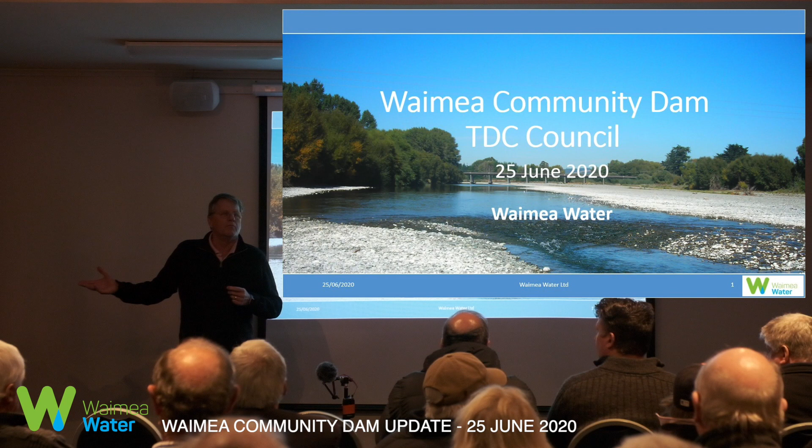Thank you. Thank you. Tēnā koutou katoa. Good evening. Thanks for coming out on a winter's night.

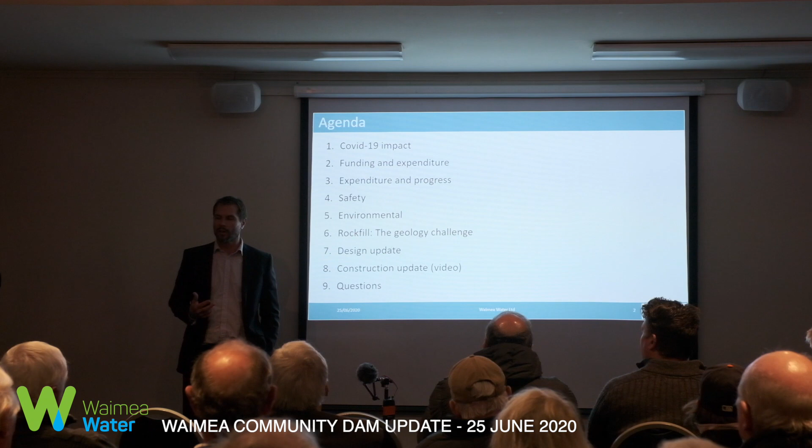I thought tonight what we'll do is just go through a few slides to give you a bit of an update on where we're at, and hopefully answer a lot of the questions you have. Then at the end of tonight we'll come back to questions and address anything we haven't.

So I thought we'd start by describing COVID-19, what that's meant to the project, and then we'll talk about the money and the progress, and where we're at with the budget.

I want to talk about safety and the environmental work we're doing on site, and then I'm going to ask Ian, our design and engineering manager, to talk about the rockfill issue we've had on site, particularly around the geology we've encountered, and provide a design update.

Then between Jim and myself we'll provide you with a bit of an update on construction and show you some pretty cool photos, and then we'll go to questions at the end.

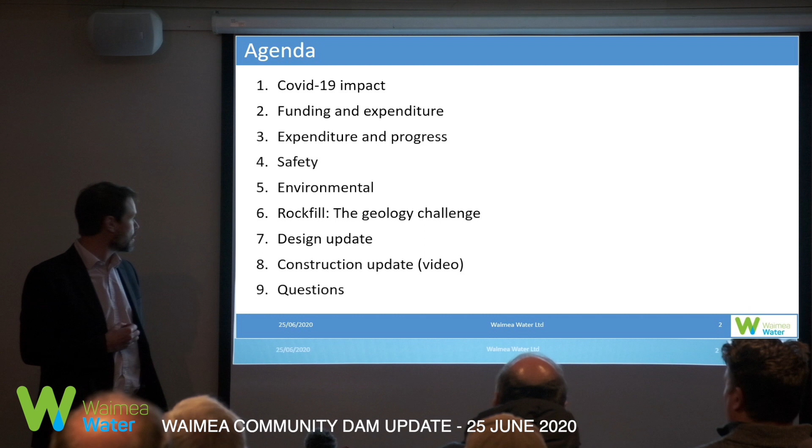So with that, before I start, let me just quickly describe our wider team to you. We have a lot of high-powered people working on this project, a lot of expertise, other than myself.

Clearly we have the Waimea Water Limited team and our board, as you can see in this photo below. We're also supported in our design work by Damwatch Engineering - that's Peter Amos and his team. Peter's here tonight, and their job is to effectively give us a PS1, a producer statement number 1 for any design, and a PS4 for the construction.

The peer reviewer for design is GHD Engineering, which you may have come across. GHD Engineering do the design review, PS2. They're also supporting Jim's team, Fulton Hogan Taylors, with the design of the temporary works. So between Damwatch and GHD, you've got a lot of dam engineering there supporting us.

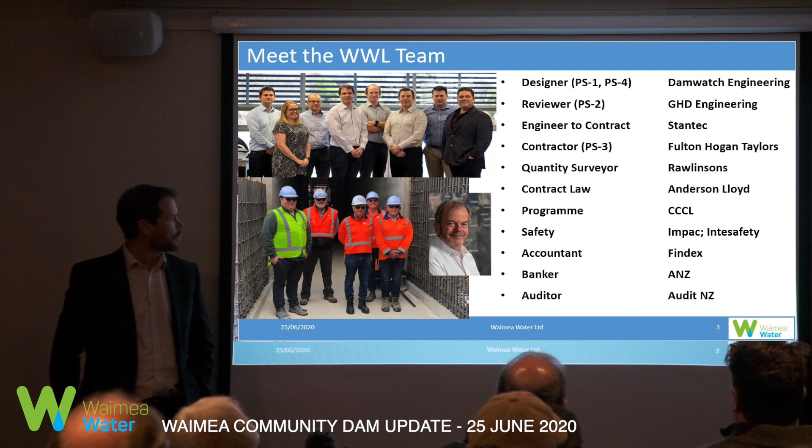Stantec, another engineering company, are engineer to contract and help us with the engineering. Fulton Hogan Taylors, it's Jim and his guys, are building the project. We have Rawlinson's, our QS, and then we have a bunch of support from some professional services in the industry.

The point I'd like to make here is you've got a pretty strong, robust team on all aspects of this project to make sure that we get a really good quality, well built dam.

So let me start with COVID-19. As you all know, we went through level 4 for 5 weeks, and that stopped work, we had to suspend work. We believe that under the MBIE guidelines we could have kept going, but we ended up suspending work for 5 weeks, and then we took a week to remobilise, put in place the additional protocols and facilities, portacoms, to ensure we could work at distance from each other.

And then there was a pretty slow start-up as we got into the new working regime. So we pretty much lost 2 months and counting. The 'and counting' part is we are seeing constraints and disruptions to the international supply chain. COVID-19 seems to be affecting countries around the world in different ways at the moment, and getting spares, machinery and parts out from around the world is proving a challenge.

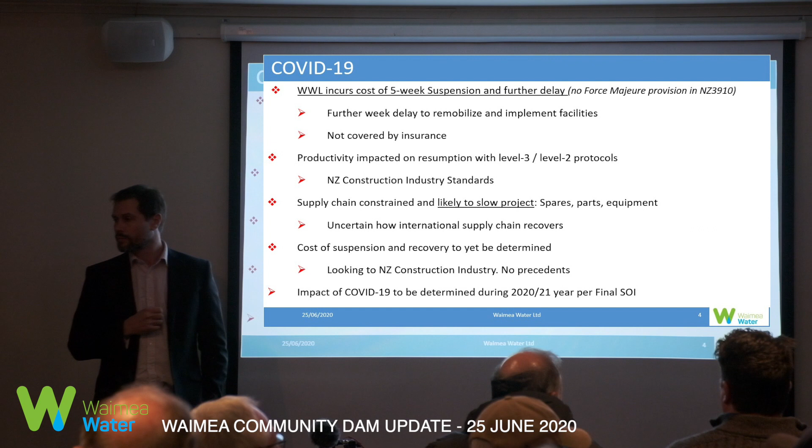Look, with respect to cost, since we last had an opportunity to meet, you would have seen the announcement that the costs have increased by $25 million, really associated with the performance of the rock in the rockfill, and we'll come back to that.

So the cost is really around the geology that we're encountering, and so that $25 million effectively comes as an additional TDC equity here.

That's this bar here. So you can see our source of financing is really from the Waimea equity and the Waimea loan, the irrigator loans, then the TDC equity, and then TDC equity courtesy of some grants, obviously from the Ministry for Environment, Nelson City Council. So there's a bunch of, I think it's $12 million of grants that they get, which converts into equity, and then the additional equity is $25 million.

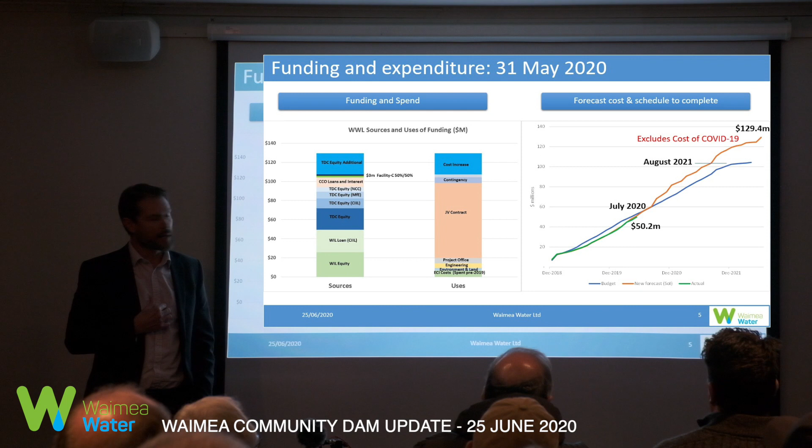So that really supports the cost increase in the project. With respect to spend on the right-hand side there, you can see we're a bit behind the forecast because we're late. We've spent $50 million to date. We'll probably go past our forecast spend in July this year. We'll go past our original budget at 104.4 in about August 21, and then we see ourselves coming out at 129.4. So we've held that number since the start of the year.

You may have seen this in our mid-year report or SOI, statement of intent. This provides just a cost overview. So right now, as I said before, we're looking at $129.4 million as where we see costs, and that's based on what we know now. There may be some wins in front of us, there may be some more costs. We've looked at all the risks we can see in front of us and put some evaluation around it. There's a fair chunk of risk money in there, but it's just based on what we can evaluate now. And you can see that a good chunk of that 16.6 is really around the geology we're encountering.

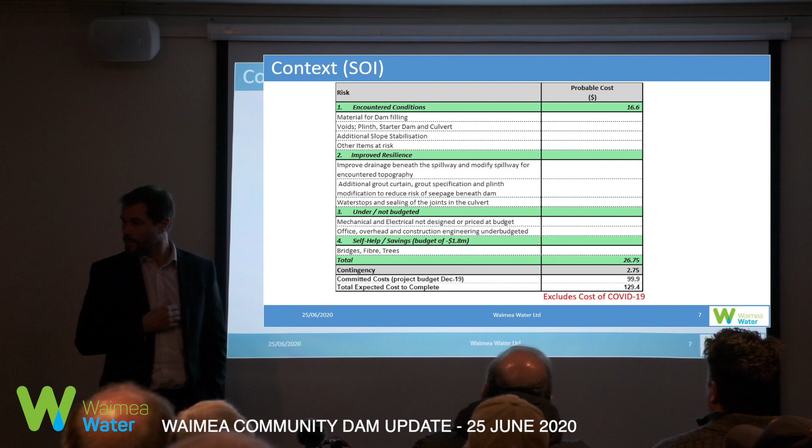With respect to the program, COVID-19 was really brutal to us. We're six months behind, which is about a season, is where we see ourselves. So we've lost that 21-22 season. We're currently working, as I said before, Jim's working pretty hard to find ways to recover part of that program.

One of our key constraints before COVID-19 was resources. You just couldn't get people. Everyone's busy, unemployment was at a record low. We couldn't get skilled resources, tradespeople. Everyone's busy building houses.

Post COVID-19, there may be an opportunity to employ some more tradespeople. So we're talking to the construction companies, and if they have people available, there could be a win-win opportunity here, where we could help support the local economy and people working while actually helping recover part of the program. And that's something that Jim and his guys are currently pursuing.

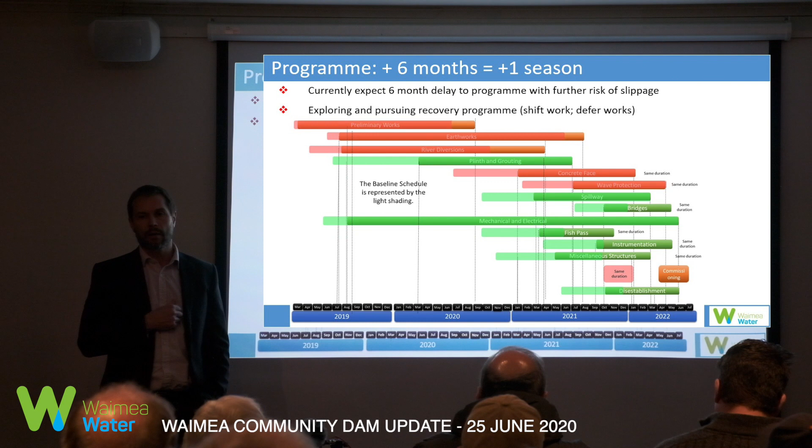So with respect to performance on site and the project, I think one of the real highlights to me right now, and this is worth congratulating Jim and his guys on, is that we've just gone past 500 days and there has not been an injury on site. That is an outstanding performance. I've never seen performance quite like that before. The mentality of the guys on site about safety is just top shelf.

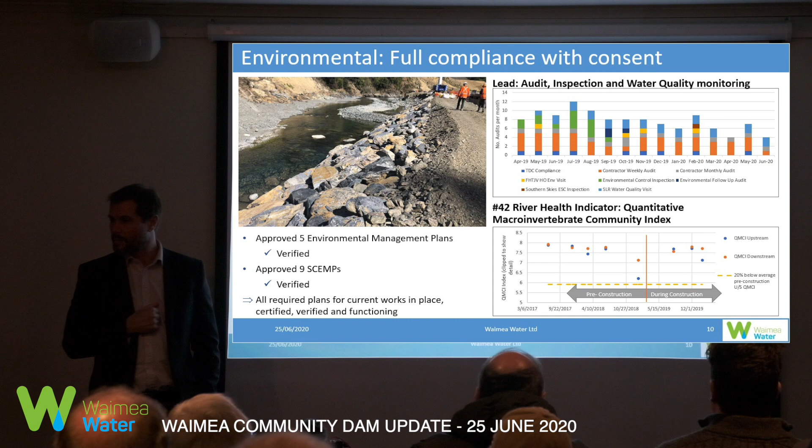So the message I'll leave you with is, we're in full compliance with the resource consent, and we're doing a lot of verification to make sure we do what we say we're going to do.

Right, so I thought we'd turn now to an engineering perspective and talk about the rock. I'll get Ian to talk about this. Since we last met, we've had some issues with the rock, and this has led to part of the cost increase. So it's probably worth taking a little bit of time to describe what the issue is and the problem is, and I'll get Ian and Peter to explain it to you, and then what we're doing about it. So, Ian.

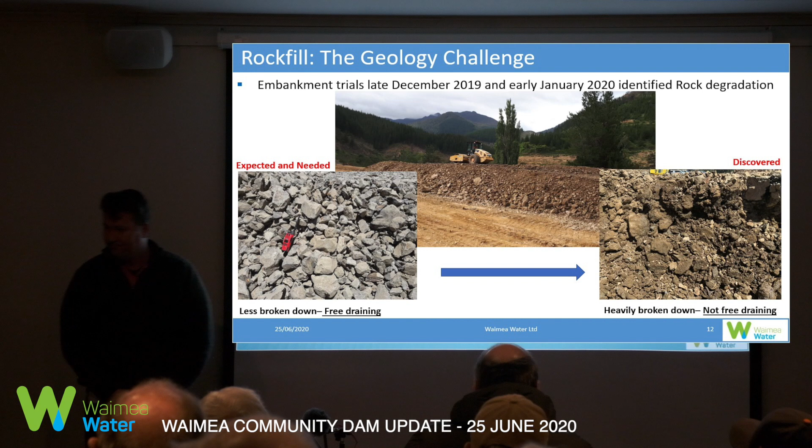From the series of trials and further drilling investigations we've done on site, we've come to discover there's actually a lot more argillite, siltstone and mudstone than expected. We had expected about a 50-50 mix of argillite and greywacke, siltstones and sandstones. But once we've opened up the ground, we've found that to be closer to 70% argillite and 30% greywacke.

You can see in the photo on your left, the argillite's got these inherent foliations, incipient foliations the geologists call them, which is a function of how the rock's formed. It's a sedimentary rock, formed in layers. But unfortunately this argillite hasn't undergone enough metamorphism, it hasn't been squeezed or heated enough to remove those.

And the issue we found is, once that's excavated, screened, dumped into a stockpile, picked up again, hauled out to the site and compacted, it's breaking down quite significantly, like we saw on that first slide. Next slide please, Andy.

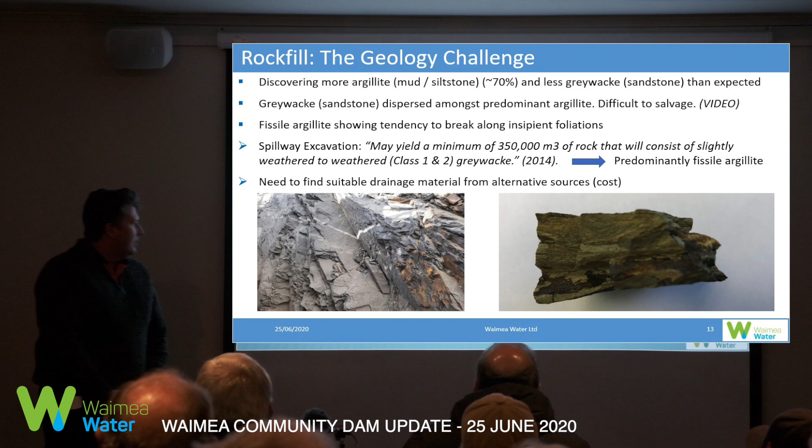So the design work which Peter and his team have been busy working on has been to come up with a solution to make the most use of this rock we have on site, also achieving the objectives of maintaining a stiff and free draining embankment.

By focusing on getting some really high quality material in there, it allowed us to construct the rest of the embankment from the native rock found on site. So we've been working very closely with Jim and his earthworks team to identify sources of rock on site. We've had a few investigation programs to look for that material, and have also been making inquiries with local quarries to supply good hard rock for those drainage zones.

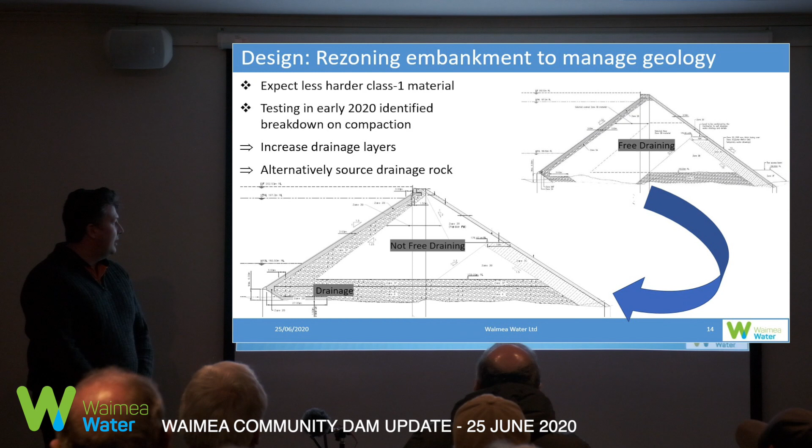So it's been very much a work in progress, the rock issue. We think we've got the design nailed down, and over the next few months we'll be working even more closely with Jim and his earthworks team to perfect that methodology and construction practice.

Both of those disasters were examples of poor drainage beneath the spillway and poor anchoring. The spillway slabs are inherently quite thin, and we rely on anchoring those down to the foundation rock to keep them in place while the spillway's flowing.

One of the early design issues we identified was that, to be fair, the original design was done before the Oroville disaster and the findings from that Commission of Inquiry over in the States. In the interim time between the design being completed and the findings from this disaster, the state of practice in the industry had moved on to require much bigger, more frequent drains and bigger, beefier anchors to keep these things safe.

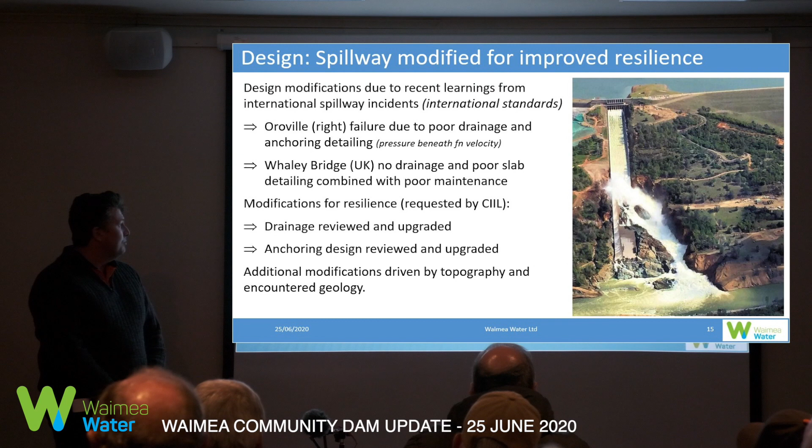The LiDAR survey was undertaken when the area was quite heavily vegetated and didn't seem to very accurately represent the actual ground profile.

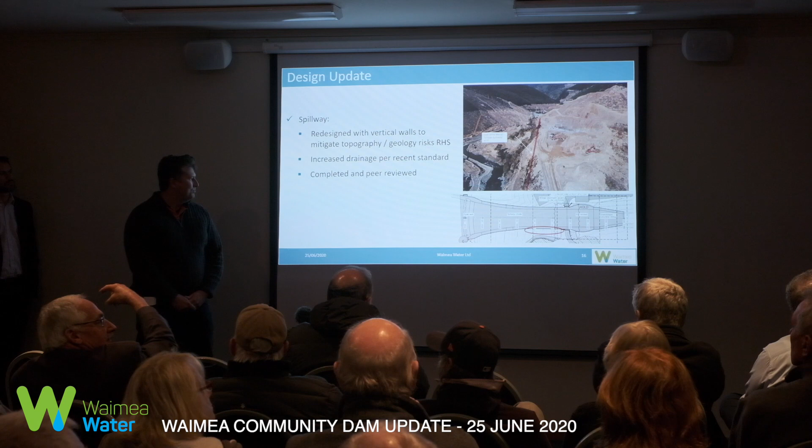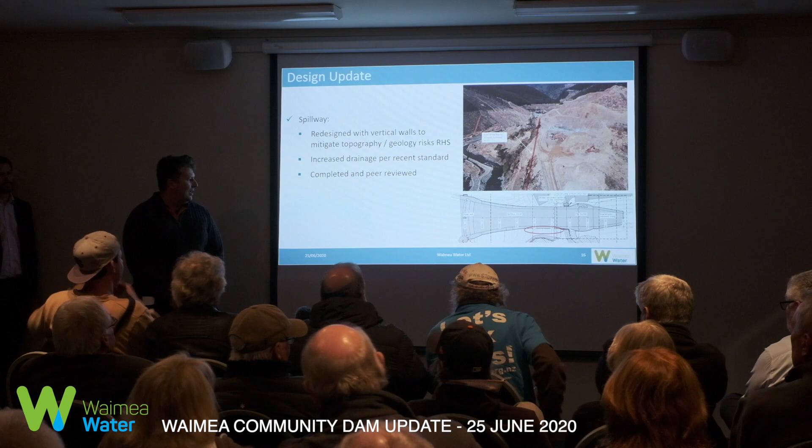So the piece of work Dam Watch have done for us there was to design some vertical walls for the spillway rather than the raked walls we had previously. The raked walls relied on having some topography there to construct them on, whereas this new design has vertical walls which fit neatly into the foundation.

The other piece was around the rock quality that those raked walls would have been constructed on. If you follow that red line again, there was a risk that there wouldn't actually be high enough quality rock to construct the raked walls on. But by switching to those vertical walls, we've removed that reliance on having rock beneath those walls.

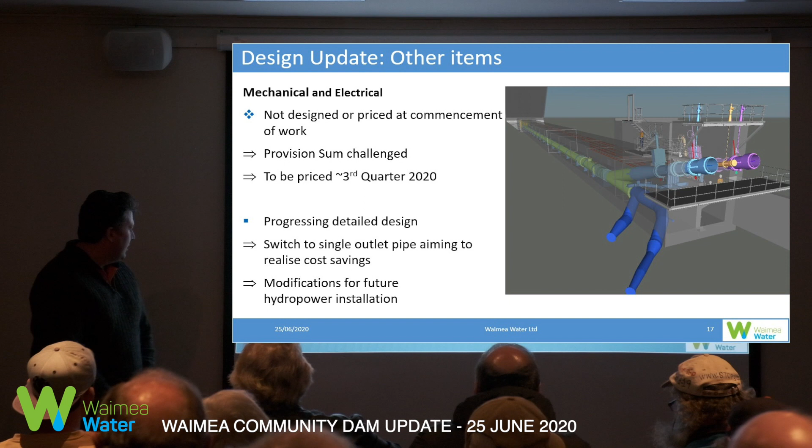We've also been looking at opportunities to, as Mike spoke about, reduce costs or speed up the program, as well as opportunities to maximise the benefit from the dam. One such opportunity we're looking at here is the addition of gates on the spillway, known as fuse gates. These are a fairly low cost element we can add to the current design, which allow temporary storage of water above the spillway. The real benefit of that comes in increased utilisation of that future hydro scheme.

Just to summarise a few numbers: if we had 2.3 metre high gates in the spillway, that would increase our storage by about 15%, an additional 1.5 million cubic metres of storage, which you could then use to increase the utilisation of your hydropower, or potentially to increase the reliability of your water supply, or to provide further drought resilience.

That's it. Just go back, Amy.

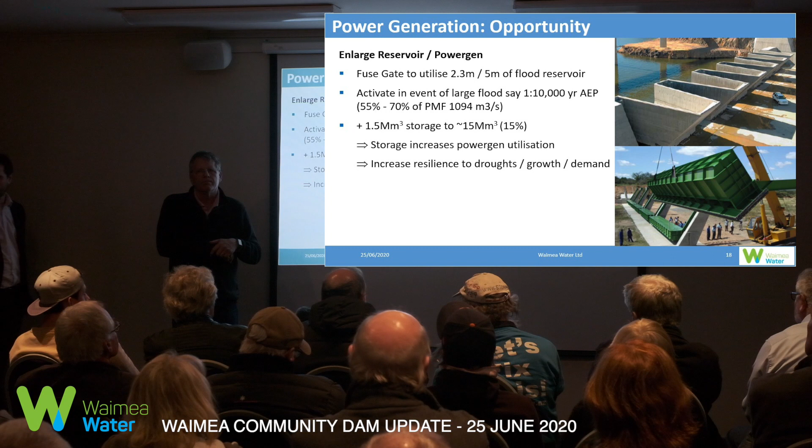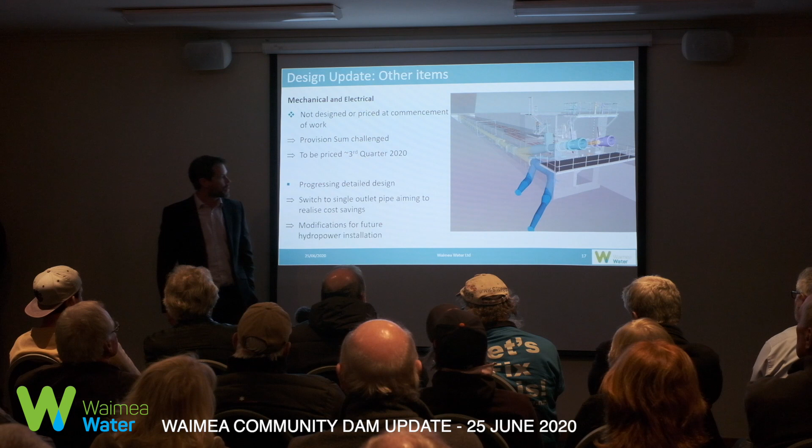In your previous slide, you had the mechanical engineering one, and that hadn't been priced yet, so who's funding the pipework, the engineering side of it? Yeah, we are. I mean, this is all apart from this blue stuff here - this is all required for the dam. It hasn't been costed, but it's been budgeted. So there's an item in the budget for this, it's called a provisional sum. So there is a budget line item in there, but it wasn't priced at the time of the contract.

So how close is that, the pipework on the top there? There was an estimate for it, yeah, but it wasn't... there was.

Joking aside, the design wasn't complete. You gave the public a cost for the project, and now you've got overruns. There was an estimate for the pipe, the mechanical work, and the electrical work, but there wasn't a contract price because the detailed design had not been done.

So what's it going to be? Well, we're still working on that. Literally, the prices are out and people are tendering. So is the price going to 900,000? Well, we haven't got the prices back yet. We haven't got the prices back. They might even come in cheaper.

So what did you budget for it then? It's part of the contract sum. But that keeps getting bigger. 83 million. We've budgeted for the work, and we've identified what we think the reasonable risks are around that, and put that in the budget as well. But we've got to wait to see what comes back in from the tenderers.

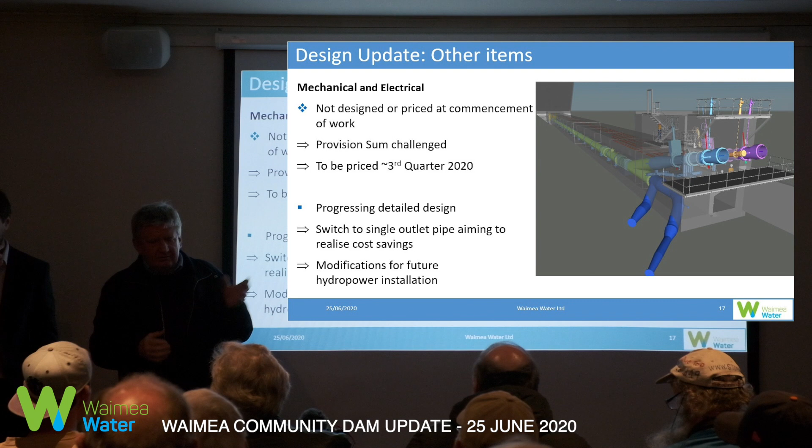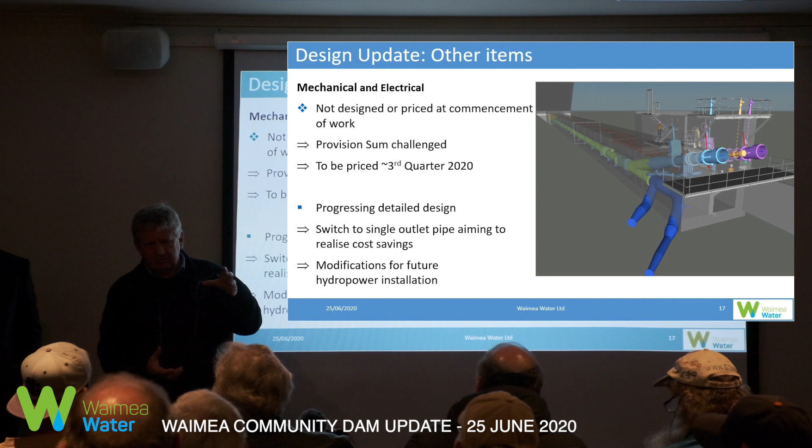So positioned right on the top of that spillway that Ian showed you the picture of, they drilled down to where the bottom of the spillway would be. So they tried to drill through the material they were taking away. The top piece is weathered soils, so they always anticipated taking that away, and then the zone, the layers of rock below that, they extracted core.

When they were drilling it, did they have much problems losing water to the bit? The records were that you'd hit some feature and lose water in the feature. You drill beyond the feature, and what return of materials did they use to pump down the casing to seal it? Well, the records showed that it was all water flush, no muds or anything used. No, I mean to seal it, to hold the water at the rods and at the bit, to stop losing water all the time off the bit.

The holes were cased, so the casing went past that point. Yeah, well, they would have gone past the casing further down. What depth did they go to? So the holes are in the order of 30 to 60 metres deep.

So when I'm trying to get at it, if they were losing water at the bit, it shows you just how broken the area is and how poor quality the rock is. Oh, well, yes, you're correct. If you look at a tray full of the material they extract, it's reasonable, and then there's a shattered piece, and the shattered pieces are basically from millions of years of earthquakes and so on.

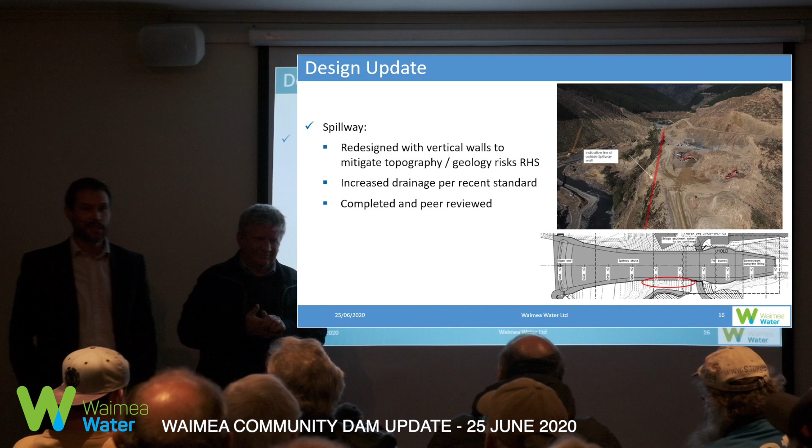Obvious—come on. Yeah, I mean, if we'd been given more money, we would have done more exploration. But no, seriously, the exploration is not cheap. I can't believe that just came out of your mouth. So you want more money?

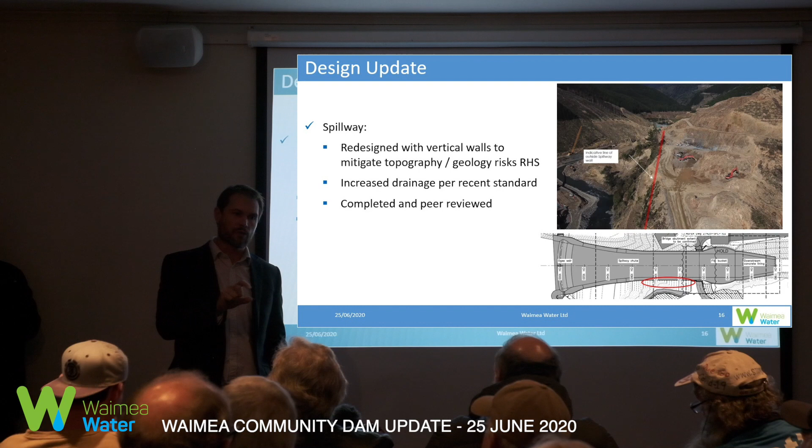No, this is before—you haven't got a price for the steel, this is before the project was funded. You haven't got rock there you can use. Exploration was done on a very finite budget, and you can never do enough exploration. We could have put 40 bores in there—maybe we would have picked it up.

It would have been better putting some weirs in the river and letting it build up its own natural dam. So what would the cost of putting 40 holes down be? I bet it wasn't 29 million. I don't know.

So let's be clear here—okay, maybe in hindsight, and hindsight's a wonderful management tool, you would have picked it up. But the design done by the designer did not accommodate this material, right? So the design that was done did not foresee this, and that's the design we're working with. So, look, time to stop it then if you've got major issues with it.

Sorry? Time to stop it if you've got major issues, I'm going to show you with some photos in a second, and it will cost you more to stop than finish. Right? Never. Sorry? Never.

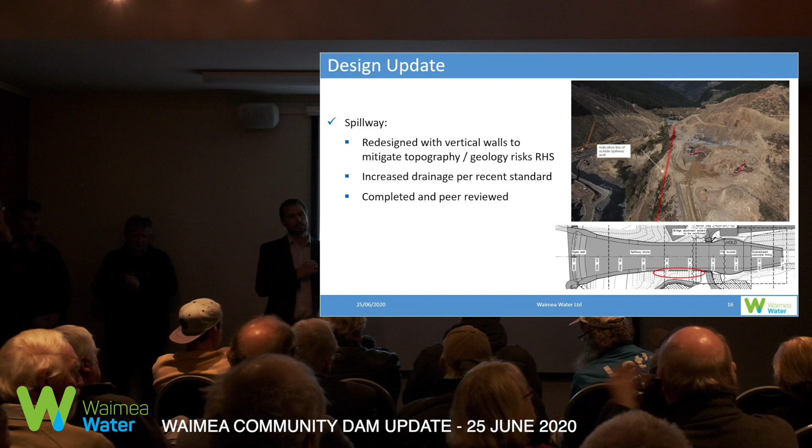No, never. Tonkin and Taylor put caveats in numerous reports, and their reports on the quality of the rock always contained a caveat—hopefully, maybe, perhaps, that sort of nature. And this is why it's bounced back onto you from the council, from Bush King and Drummond and Kirby, that they're trying now to say they obviously relied upon experts and so on. I appreciate the difficulty of that, but at the same time, come on now and say we found all these difficulties—it doesn't really wash, because they were there to be seen.

And understandably, your difficulties will occur. Yep. But this is a huge burden on people, and it's very, very worrying for people who actually got to end up paying for it.

Yeah. Look, I—be accountable for spending other people's money, I get it, right? Rather than talking about hindsight.

So we've got a design that Tonkin Taylor did. It did not foresee this. It did not have a continuous drainage layer. We have discovered material—this is just a small part of the drainage layer. Three quarters of the embankment is not impacted, right? So we're adjusting the drainage layers for the conditions. The first thing they teach you at dam engineering school is adapt to the conditions, right? So those of you who've been to engineering school know that. You adapt to what you get, and that's what we've done. I shouldn't have to apologise to make a dam safe, right? So that's what we're doing.

Actually, what they do say is you do your exploration first, and then you adapt, and then make a decision on what you're going to do. You got it back to front, mate—you don't put P95 halfway through.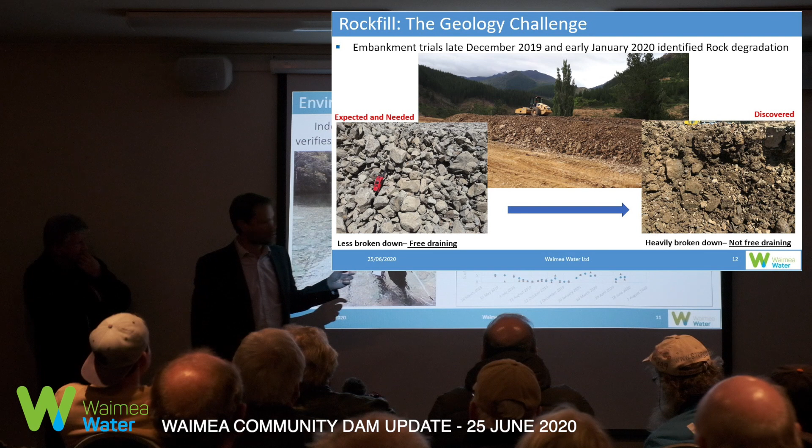So that one there, so we can still use that photo you saw on the right, where you just said don't use it. We can still use that in here, right? Yeah, so the logic is we put good free draining material here, so in the bulk of the dam we can still use the other stuff. Will it subside over time?

So it will settle as we build the dam, right? That's planned, right, Peter? But the theory is we can use the indigenous rock in the bulk of the dam here still, right? So by importing some drainage rock, we can still use what's on site for the bulk of the dam, for the filler. Yeah.

You're going to compact that? Yeah, it all gets compacted. I'd still be a bit nervous about that, I'll tell you. What about volume of water in that rock? Would it start over time and ooze back? Well, that's what the drainage layers are for.

Peter's guys have done the calculations, the idea is if the concrete face was... no, I was talking about oozing this way, outwards. So while it's dry, without being completely saturated, it will stay where it is. Because once you get weight behind it from the water, that soft rock on the outside is good enough for that, it's fine for that sort of scenario, because it's got this drainage layer.

Right, we had Richard, gentleman in the corner. Have you pretty much sort of sourced how much extra rock you need now? Or are we likely to hear we're gonna need more?

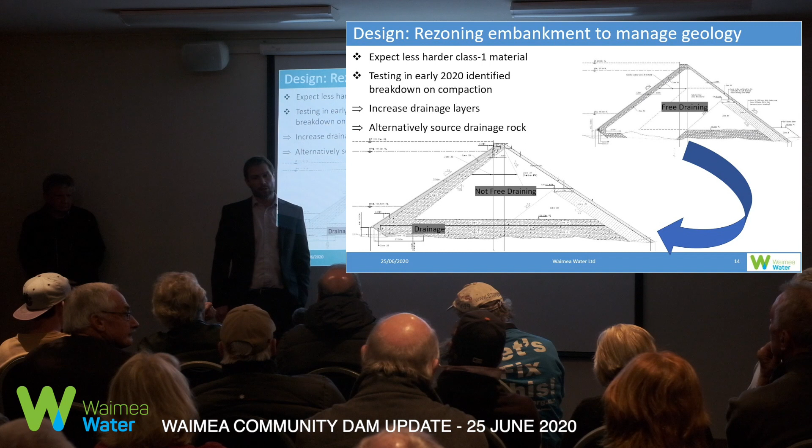So your second question first - the aggregate for the concrete is always going to be imported, right? And that's for quality control, right, Jim? Yes. Your first question regarding the roads, yeah, we are conscious of the roads, and part of the cost we've described includes managing those roads, so some work on the roads.

What we are doing is, the sooner we get started - and we have already started and brought in the first 10 or 20,000 cubic metres - we can do it reasonably slowly. We don't have to bring in a huge number of trucks each day.

Sorry, who was next? Did you want to ask your question now? You might have talked about it before I came here, but is that a sort of a filament on the inside of the dam there?

Yeah, so there's actually a number of zones in the dam, and they have different duties. Do you want to talk about the zones, Peter? Sure. Okay, the 2B - so there's the face on the dam.

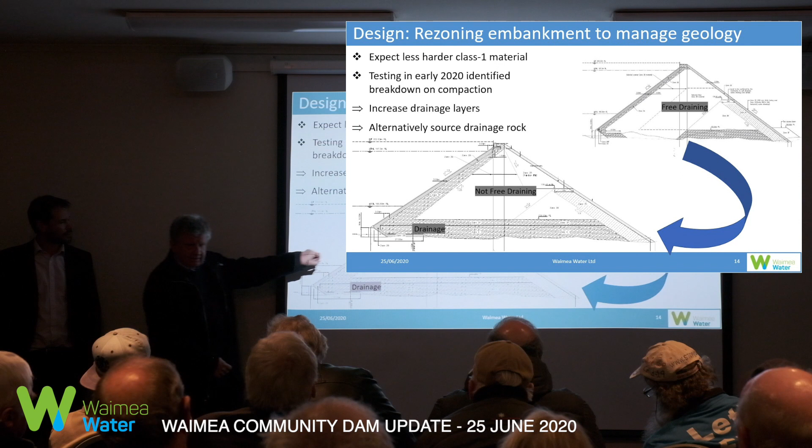Concrete face or the PVC, but behind that is a zone, the one without the big circles on it. That is a gravel, and its job is to restrict the flow if ever this was to have a leak - that's its absolute number one function, deliberately. The zone behind here drains any water that gets through that.

Because the reason I'm getting into that - we're talking about the rock we looked at on the left-hand side that's going to be where your circles are. Is that correct? Yes, yeah.

Because that rock splits in very sort of slithers, if you like, almost like adzes. When you have it on the road and it goes through car tyres, truck tyres - if it's there, and you've got an earthquake, and it goes up and down like this, it will cut anything in front of it.

So the rock you described as being sharp and so on is the rock that's going in here. Okay, so that's the mudstone and the stuff that - the hard blue rock we saw on the left-hand side. When that breaks, it turns into very sharp pieces.

It's not too bad for that. We've looked into the sort of angularity or sharpness, whatever you want to call it - that's not actually too bad for that. And this material here comes from the riverbed, so it's the rounded gravels in the riverbed.

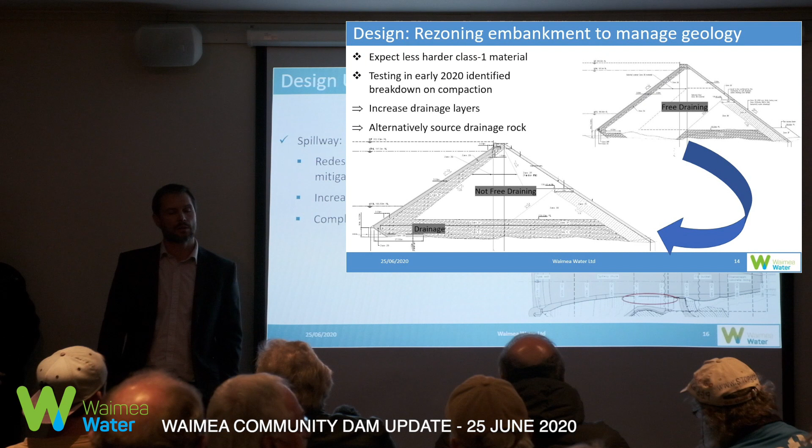Questions? Let's go to - oh, yeah, sure. Yeah, if I could come back to your slides earlier on regarding costings and the cost of COVID-19.

A figure has been mentioned of something of the order of 13 million, and one of the things I think you said was that could include employing some tradies who might be unemployed because of the effects of COVID-19. But still, that won't be all of 13 million, and I'd be interested to know how it tots up. I'd also like to know that in light of the fact that the COVID-19 payments paid out by the government - to Taylors Contracting amounted to over $150,000, and to Fulton Hogan over about $3.5 million. So it's not as if those two companies should really be coming to Waimea Water for some sort of funding to help them over the period. So could you explain what it is that's made up of?

It's made up of two parts really. The first part is the cost of the suspension. Sorry, could you speak? I really can't hear you. Sorry, the cost of the suspension, and then the cost of the recovery, right? So that was the number that the TDC derived.

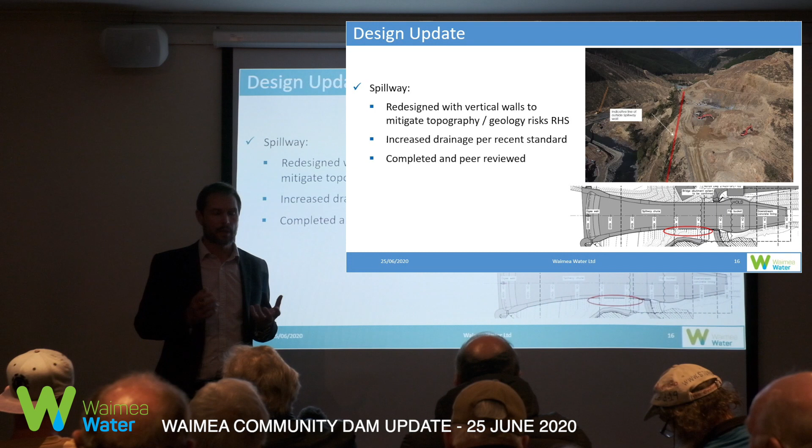With respect to the payments to the contractor, there's much more cost than the $585 a week, whatever the government gave. But suffice to say, the liability for costs between contractor and principal, and who indemnifies who, is a national issue, right? So the whole industry, NZTA, all the contractors in New Zealand are trying to figure out how to resolve this. It's going to take some time.

Clearly, parties are going to incur costs. There's a lot more cost to site than simply $585 per person of wages, and so there is a lot of work to go yet. It's going to be added to the dam as well.

Can you go back to your hydro? Do you happen to have a couple of hydrographs that show your expectation of flows with the hydro project in place versus without hydro? In other words, what are you going to do to the flows essentially?

You're going to put a surcharge on the dam basically for hydro. So what does that do to your outflows? So you can't run a hydro plant on and off, it's got to be a continuous thing.

No, it doesn't have to be continuous. In fact, peaking plants don't run 24/7. What the generators are really interested in is peak demand, where they're vulnerable in an 8-hour period around early evening when demand is maximum. The interest is whether we can use hydro for that 8-hour period, storing water for the other 14 to 16 hours and then using it just over that 8-hour period. That's where the interest is, and that's where this is actually a pretty good fit.

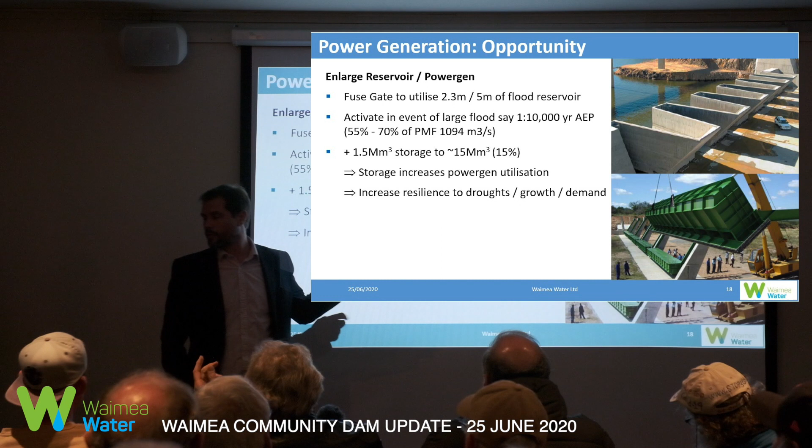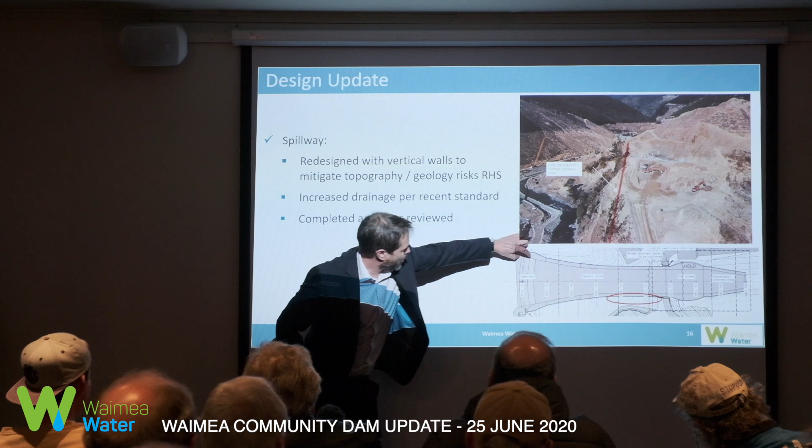Let's go forward one. No, go back a couple. So there's an ogee weir across here, which is about 2.3 metres high. This will basically be replaced by what you saw in those last photos. This spillway and reservoir is designed for a probable maximum flood of about 1,100 cubics.

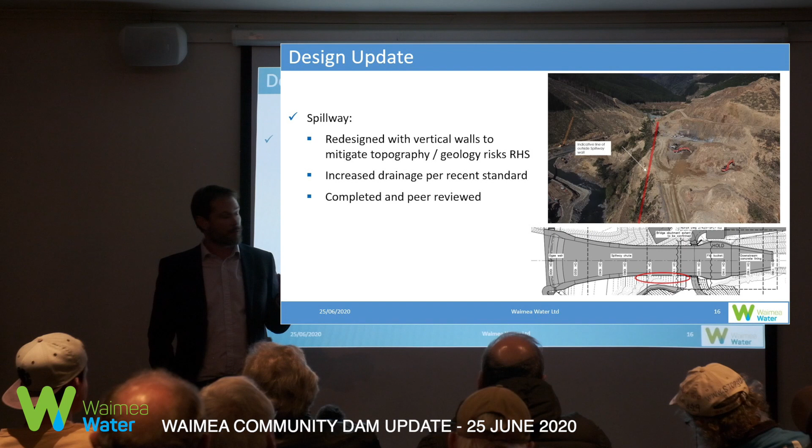So you're going to hold the water back from going down the spillway. How are you going to do it? The spillway is designed for 1,100 cubics, which is called the probable maximum flood, right? Which actually never happens, it's almost infinite. I think from memory it's about 3 times the 1-in-100-year flood, so it's a very, very rare event. There's a huge amount of catchment area, and the spillway is designed for something that probably will never happen.

What these fuse gates are designed to do is use that storage and basically trip at a much lower level, so that you could actually trip them at a 1-in-10,000-year flood, which would be around 50 to 70% of the maximum flood. So with that structure in that spillway, how much higher is the dam in relation to that?

Is it going to be able to go over the top of that before it breaches the dam? If that fails and they can't... Yeah, that's the idea. Yes, there's a wall on the top of the dam, which is higher than any of that stuff. About 3 metres, 3 to 4 metres higher than that.

Sorry, you had a question. COVID-19, you've got to admit this is financially a bit of a disaster for the TDC. We've got the port and the airport shut down, and the TDC must be putting some figures together now of the impact at the present time, without having another shutdown for the virus taking off again.

What about the possibility of mothballing it and coming back when the TDC is a bit stronger in 4 or 5 years' time? Well, it would be one hell of a financial cost.

Let's just go to construction. I think it's worth showing you where we're at construction-wise, because when you see how much has been built, you know, to leave a dam half finished and pay the contractor out, or tell them to suspend works, is one hell of a cost. And then you need to come back and reconvene later. If you see what we actually built here, you'll realise that there must be a limit to what the TDC can stand.

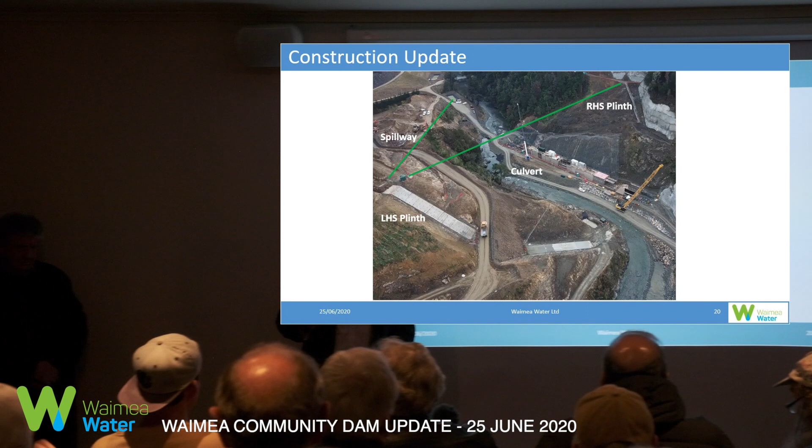And this helps those industries, yeah, but on average it doesn't really affect Joe Blob, you know, the rental flats just down the road here or anything like that. Sorry guys, we just want to have a sensible discussion. It affects more - a handful of people at the top who are going to make fairly large sums of money, and I know quite a few of them in Motueka.

But don't the Joe Blobs eat the community vegetables? They're not going to be rewarded at all. All that's going to happen is rents are going to go up.

So the cost of last year's drought on the economy was $50 million. That was people out of jobs, not working, not spending money in cafes, that sort of stuff. So what this does is it helps our resilience to those sort of $50 million drought hits. People lost their jobs during that drought. People didn't buy tractors or machinery or software.

The drought impact is not only great - sorry, for Nelson. So, you've had a good go, okay? Yeah, okay, you've had a good go. Right, you're telling us the rest of the community is going to gain from this.

Where's the pipeline going out of this supplying water? Where's the reticulation system out of this supplying water? It's not going to supply to any town where these ratepayers are living, is it? It's a natural pipeline. It's the river and the aquifer, right?

And this is the beauty of the system. So with a pipeline, you could cut the dam down to half the size, because you wouldn't have to pour the water into the river to pump it back out into a pumping system. You'd actually flow it out of a storage area, so you could keep a fair bit of water flowing out of the dam naturally and have enough held back there for your reticulation, running through a piping system.

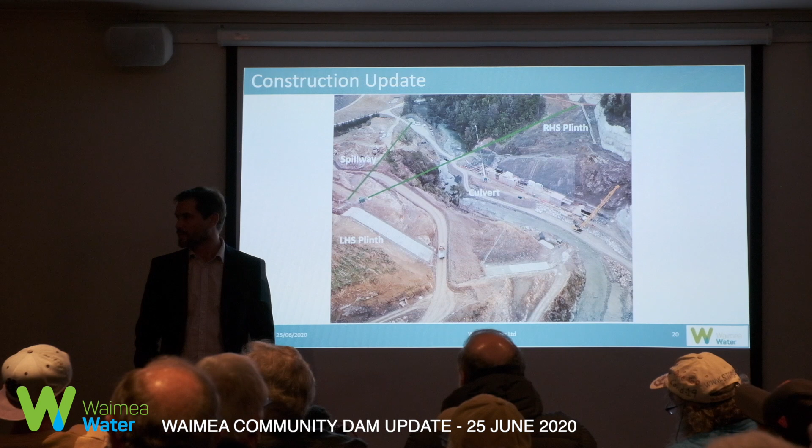Sorry, the system has been proved, so we're not going to go through that. We're trying to give you an update. Well, if you're not going to build a big dam, you're going to have to build something smaller, and you need to go back to a reticulation system.

No, we're not doing that, because a third of the flow is for environmental flows. Sorry, hang on. We're trying to give you the facts here so people can make their own decisions at the end of the day, but we're trying to give you an information evening and an update of where the dam is at. We're not going to relitigate the dam in the first place, okay?

So the Ministry of the Environment's providing money to the dam, right? In fact, it's TDC equity. They're giving money to TDC, a grant, free money. Here's the money, it's now going to be TDC equity, and that is for environmental flows, right? So central government is giving TDC money for the benefit of environmental flows in the river. And at the same time, my tenant's rent goes up because I've got to pay more in rates.

Sorry, game, set and match. You were just telling us that it's a proven system, the reticulation. Yes. I've only been here 15 years, I've never seen that river dry up. Now, if the theory, which I've been told, is you increase the flow, or if there's water in the river, it's going to sink down.

I've never seen the water of that creek run dry yet. That's probably the last thing we want, and this will prevent it doing that, okay. It has gone dry, and there'll be a number of people in the room who will verify that, and it should never go dry again, and this will prevent that.

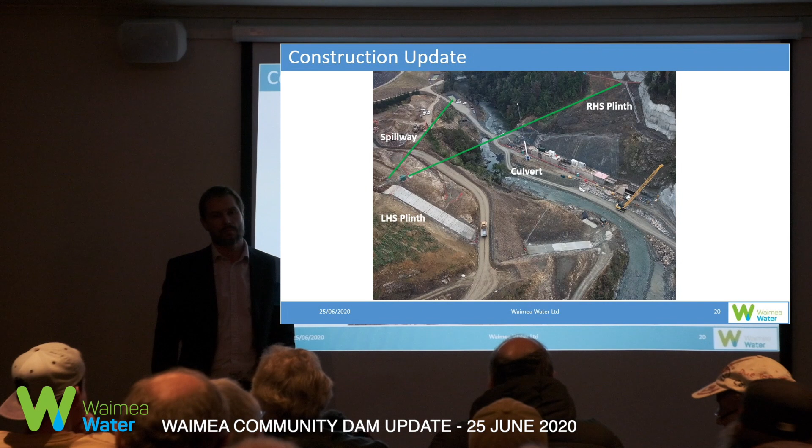Last summer was when they were all cracking the whip, saying it's going to do this, that, and the other thing, but there was still water in there. Now, if your theory is that if there's water running down the river, it's going to go down through the filtration system and fill the aquifer up... Correct.

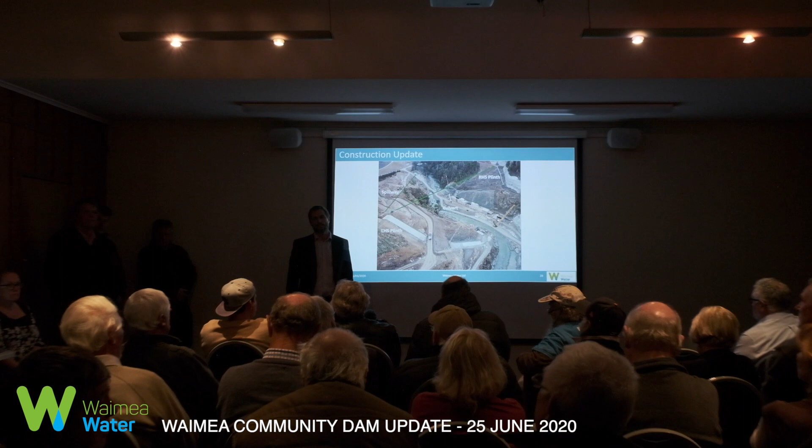Well, there should be no water running through there down the river when we're dry, it should have all gone down. We're not allowed to run the river dry, and all irrigators and producers, myself included, were rationed. That's what happened, and the river is not allowed by government regulation to go dry anymore, for two reasons. If it went dry, we'd get saltwater intrusion and TDC wells would be in trouble. Yeah, I understand that. Okay, can we move on?

Okay, so let's talk about where we're at with construction, because we've actually achieved a lot. The culvert is the main vehicle for diverting the water through so we can build a dam—that's this concrete structure in the middle here. That's coming up to 80% complete. It's a very decent concrete structure, 160 metres long, due to be complete in a few months, and we'll come back to that.

This on the left-hand side is the left-hand plinth, so you can see the plinth being formed down here. And if you look carefully, you can see that the anchors have been drilled in here.

On the right-hand side, you can see the plinth at the far side there, underneath the stabilised area, the bank that's been cut back, and you can see the spillway cut happening down here. This green line basically shows the future crest of the dam. So the left-hand plinth and the culvert are very well progressed, and the right-hand plinth is moving pretty fast now as we get into that spillway cut.

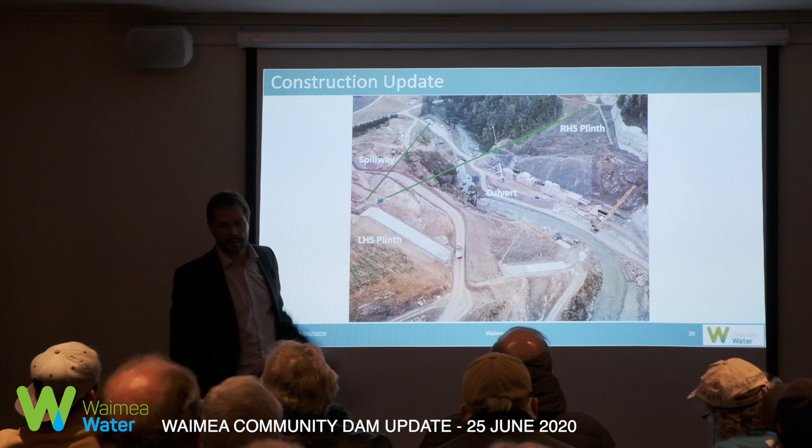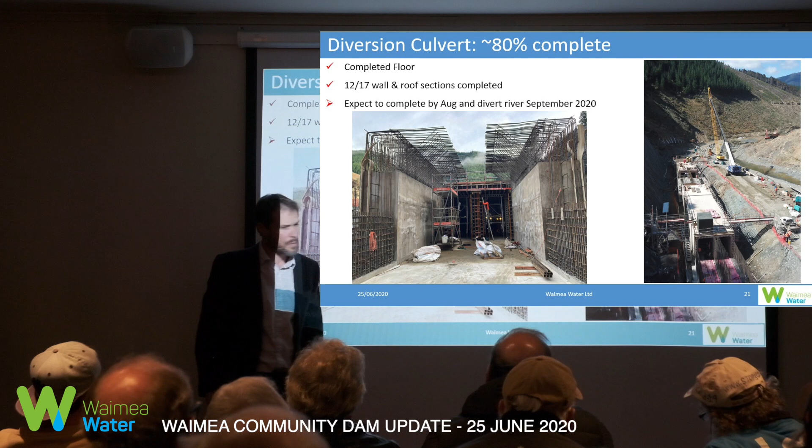So is that where the pipework's going inside that? What happens with this diversion, this culvert, is while the dam gets built above it, the river's going to flow through it. Then when the dam's built, we seal it up and put the pipework through it, so the pipework then runs through that. And that was that 3D model you saw before, the pipework coming through it. So that's got to be costed in to install it inside there? That's the plan. Yeah, okay.

So if you look at the left-hand side, you can see here the plinth is being formed up now, and this is really the toe of the dam. Peter alluded to this before. So this is the toe of the dam, and it's anchored into the rock. You can see the anchors here, anchored into the rock. They then drill the grout curtain through this, so that's the cement curtain that goes beneath the ground.

How deep is that? Up to 30 metres. Yeah, so we go down 30 metres for the grout curtain. It seals into the face of the dam. So basically you've got 50 metres above here, 30 metres below ground, all being sealed and held together along this plinth line.

So you can see here they're drilling those anchors. And on the right-hand side is the formwork that's been used to pour this concrete plinth.

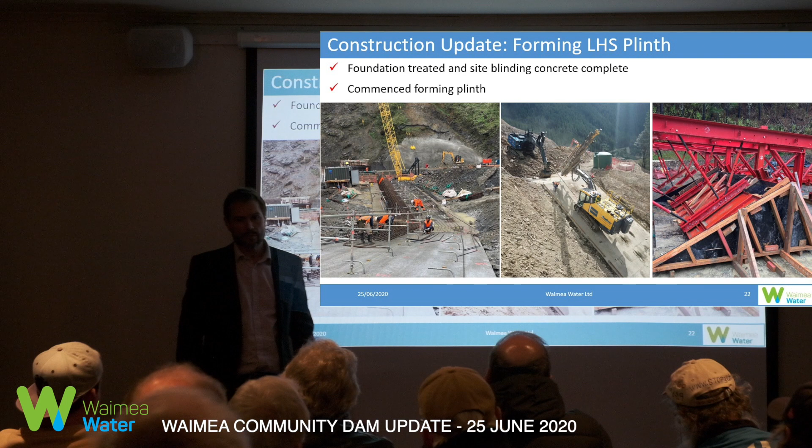On the right-hand side, Jim's guys are busy preparing the plinth right now. They've poured a little bit at the top here. This is dental treatment, so as we clear the foundation rock, clean out the debris, and then fill it, put fillings effectively into the rock, and then we'll be close to pouring concrete down the right-hand side as well.

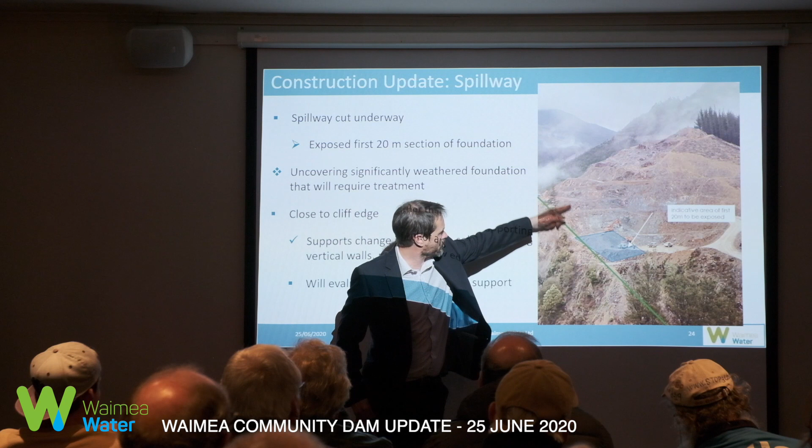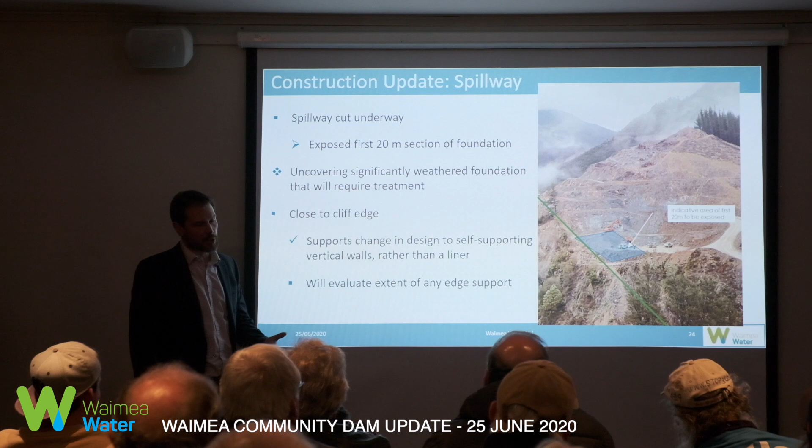With the spillway, so as Ian said before, the spillway cut is well in progress here. That's the cut coming through here. This is the side of the spillway. You can see they're busy clearing this piece of foundation. So we're not too far away from actually inspecting and preparing the foundation for the first part of the spillway.

But we do have the geological challenges you'd expect. One of them is voids. You can see here we get these holes of soft rock that have to come out. It's in front of the culvert, downstream from the culvert. These need to come out and be filled with mass concrete. We've used about 1,000 cubic metres of mass concrete so far, filling these holes up.

Here's a classic example, you can see we've got some rotten rock through here. We've had to pull this out and then pour concrete through here, basically replicating the rock. But this is going to happen where the water is going to be stored, isn't it? It's going to build pressure up under all this sort of structure and start working away. So this here is the plinth, it comes through here and gets anchored through this, and then the grout curtain goes 30 metres below down here to seal it all up.

No, I'm talking where your lake is. It's going to be happening under your lake, isn't it? Yeah, so the lake's upstream here. That's right, so this sort of effect is going to be happening under the lake. You're not going to be able to control it, are you? You're going to have the same problem they had at Clyde, and they had to pour so much concrete at Clyde, it was unbelievable. It was 10 times the cost of building the Clyde Dam, just to hold the structure and the hills around them.

No, talk to Clyde, I don't know. This is a big topic in itself, Clyde. It's the same thing, just on a bigger scale. No, well the Clyde issues you're talking about were big landslides, huge landslides on the hills around it. The dam itself, fundamentally the same sort of thing was going on.

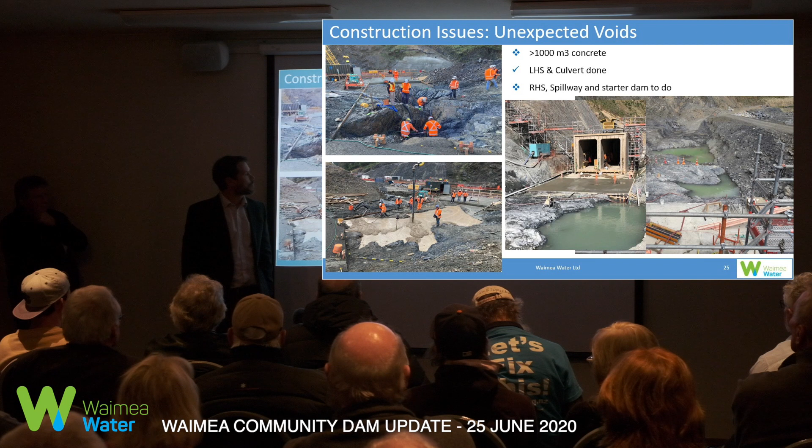Thank you. All right, finally, just get the next slide. So I just thought I'd wrap up, and then we'll go to questions. I recognise that this is a big project for the region, right?

This is the first large dam to be built in New Zealand in 25 years. So in that time, New Zealand's population has grown by 60%, right? So we've not built any infrastructure for 25 years. The population's gone up by over 50%, 60%, and this is the first large dam. So I understand the angst, right? We're not used to building infrastructure. But look, it's worth touching on some of these numbers.

We're excavating 633,000 cubic metres. We're putting 430,000 cubic metres into the dam. We had 22,000 cubic metres of concrete being poured, almost 4,000 tons of reinforcing steel, and another 10,000 square metres of mesh, 4,200 anchors. The concrete face is 10,000 square metres, and all this for the price of 130 bungalows in Auckland.

I don't care, I've been around enough projects to know. That's what you're just saying, that's what it's going to cost. No, that's not what I said, you're misquoting me. What I said is that is what we see right now, based on what we know now, plus the 13 million for the Culvert. Yes, yes, that's right, thank you.

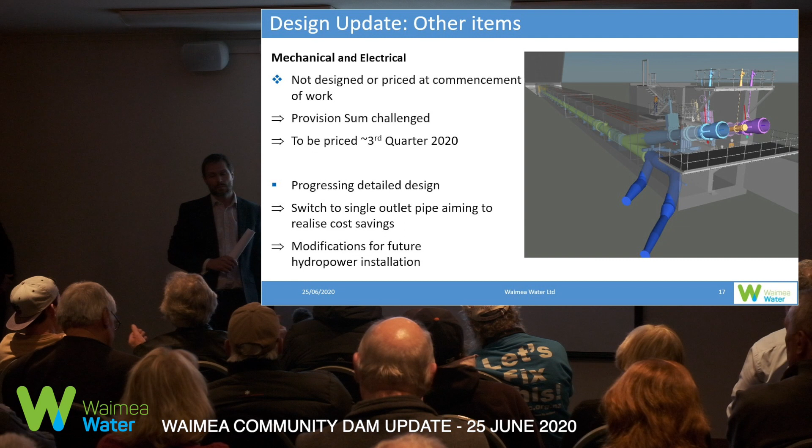I could probably drown in them. I'm asking you, the benefit to the local people who every quarter are paying their rates and they get bigger and bigger. And my water rates get bigger and bigger, which I transfer onto other people. There's no benefit for the ratepayers of Richmond.

Oh, I think it's a huge benefit. In fact, it's huge. Explain the figures to me. So the benefit I'm enjoying right now is Collins' vegetable place. They opened up, they invested, and they built a retail outlet where you can buy vegetables at lower prices than supermarkets, and they only invested because they knew the dam was going ahead.

So the benefit to me as a selfish ratepayer - most of the vegetables here get exported out to Auckland and the rest of the country. I see trucks going out every day. I am enjoying seeing people investing in the area, and I'm happy with lower price food from those cost veggies.

Sorry Matt. Yeah Mike, just a question - with this PVC, have you come up with, are you going to use it yet, or are you still deciding? Still deciding.

Just one question on it - after the fires, is it actually a flammable material? It has a fire retardant. Good, so it's been used in tunnels, for example. Okay, that's perfect then.

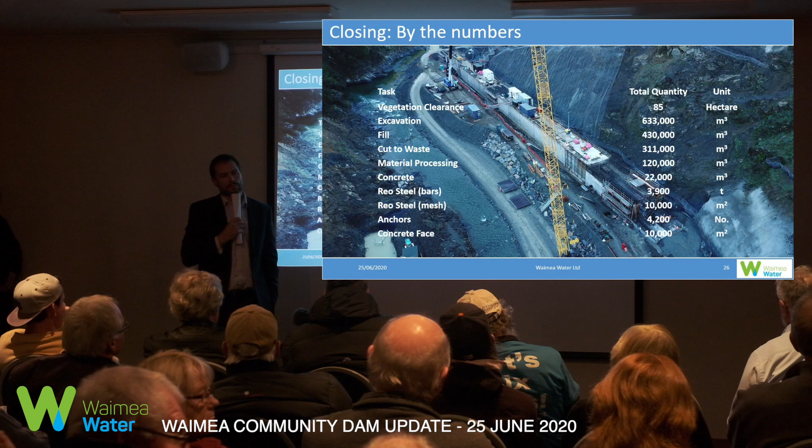The other last question was, with the power plant you're looking to put on, is that looking to be run more as a private firm coming in to set that up, or is Waimea Water looking to run that? So the actual power plant, no, Waimea Water Limited won't run it - it's not our expertise.

So it'll be run by a separate company? For example, down at Opuha Dam, which is an irrigation dam in Canterbury, Trust Power run the turbines and sell the power and whatever else. Good.

So did Andrew have a question?

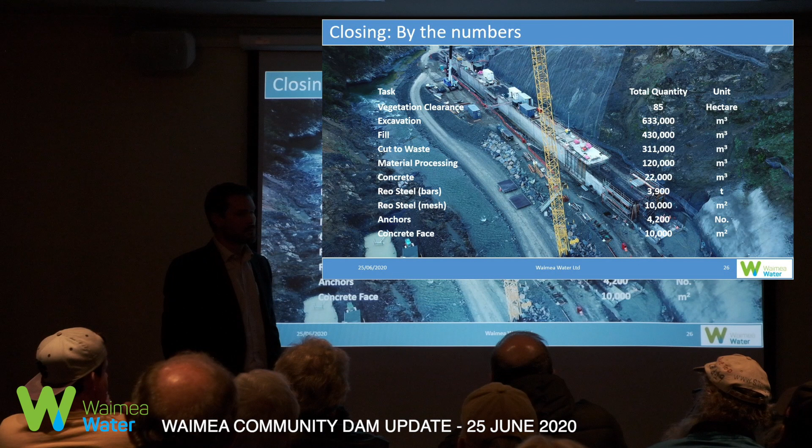I'm one of the directors on the board, but I'm also a local contractor and developer, so I have a bit of knowledge about contracting. You want to know the benefits to Richmond? We couldn't work last year with no water, so you had 30 guys that couldn't build the roads, do construction. It's not just about irrigators. I've just written a cheque out today for 3.4 million to the TDC for our DC contributions, so that's why money is going to the TDC. If we can't get water, we can't keep working. 100,000 cube, if you want to know what that is, that's what we imported to one subdivision. It's not a lot of gravel. Well, if you take the pipes out of this and shoot them into Richmond, might help your water problem.

I've got a question. What sort of earthquake will make this fail? Good question, sir, same as the one last night. Do you want to talk to the earthquake loads people? At what level is it rated at? So it's designed for what is described by the experts as the maximum credible earthquake.

The nearest fault rupturing, which is called Waimea West, is basically about a magnitude 7.4 earthquake on that fault, something like that. I can't remember off the top of my head. So the dam has been analysed to be shaken by that level of earthquake, and it will settle a little bit, but it will remain standing and perform its function.

And how thick's the concrete face on it? The concrete face is 300 millimetres, so it's about that thick. You guarantee that won't crack? I didn't say that. I want you to guarantee it won't crack, because it will fail if it cracks under a 7.4 earthquake. No, the dam will not.

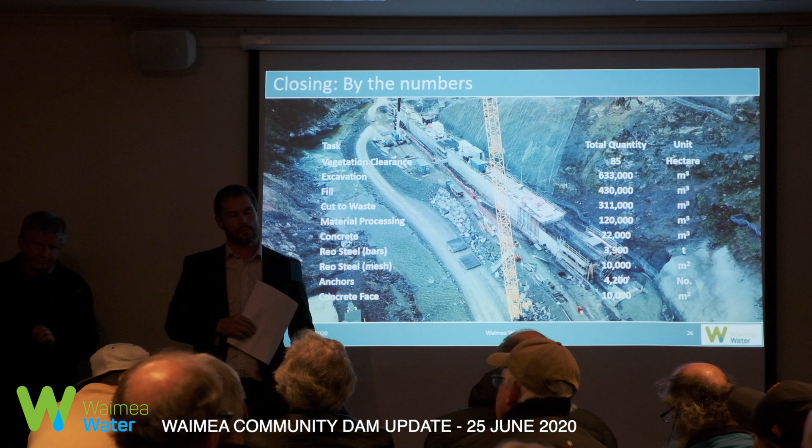And most of the time our dam won't see the UV light either because it's underwater. But it sounds to me a bit airy-fairy to say most of the time. What happens if it leaks? What's going to happen in 10 years' time when the guarantee runs out and the company responsible for maintenance on this dam has to review what the PVC layer is like and whether it needs fixing? Because the PVC layer on this dam is not going to be covered with gravel, it's going to be open to the light. So if the water level goes down in the summertime, which is when you say you're going to use all the water, then that exposed area is going to degrade.

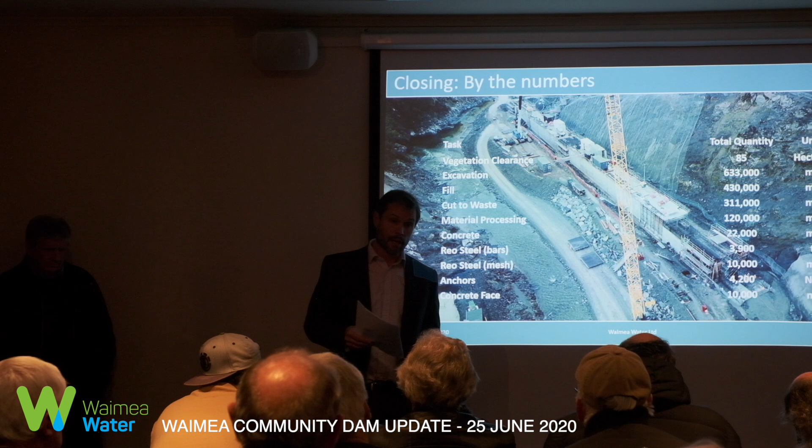Yeah, so you raise a valid point, sir, and the science and the laboratory testing is looking into that, and that would all be part of the design report.

Under the building code and building regulations, we have to demonstrate longevity, so it will be considered. And to answer your first question, this membrane is used in quite a few dams in Australia too.

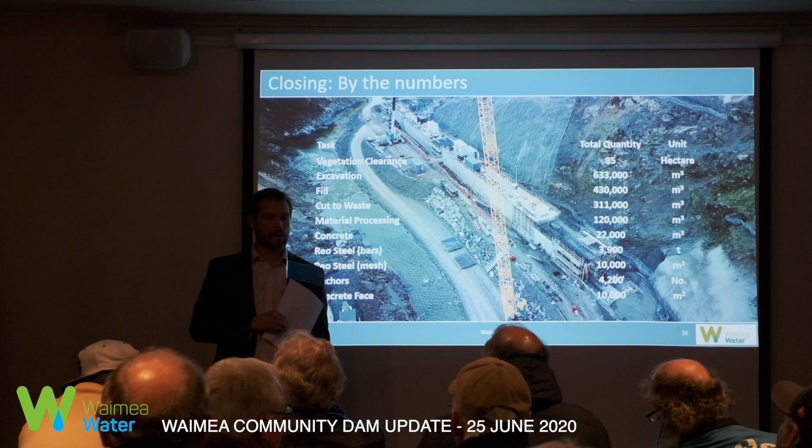How thick is this membrane? Sorry, how thick, sir? I just want to know how thick the membrane was. Just about 3 mil, I think. 3 mil. Only 3 mil?

I'm trying to get at the phthalates in the PVC membrane. Phthalates are put in the PVC membrane, I understand, to make it pliable and bendy so it can be applied to a dam wall. Phthalates have been criticised by the World Health Organization, and they've been banned in baby toys, where babies can suck them, for some time now. It concerns me and others that the phthalates in the PVC membrane might leach out into the water, and probably will, and represent a danger to aquatic life and possibly humans. I wouldn't really fancy it in my coffee, I don't think.

Are you concerned about the lower molecular weight phthalates or the high molecular weight ones? I'm concerned about the existence of phthalates in the PVC membrane, which are included to make it pliable. Do you understand, sir, the difference between the lower molecular weight phthalates and the high molecular weight? I'm not sure that I do, but the point is, can you answer the question?

So some lower molecular weight phthalates have been banned in Europe, right? You're correct, they are the lower molecular weight ones. The higher molecular weight ones, which have more than six carbons in them, have not been banned. They've been verified as being safe by the EU chemical safety body. You're saying there are phthalates which are safe. Yeah, and these are in the PVC used in the product you're referring to. So they have a higher molecular weight with more carbons in it.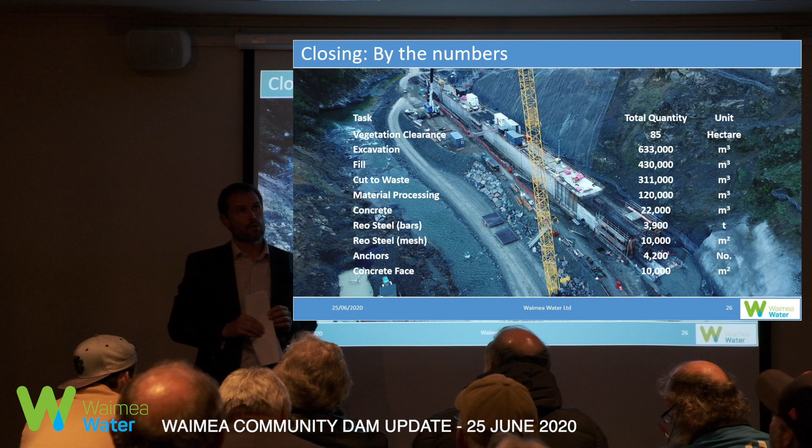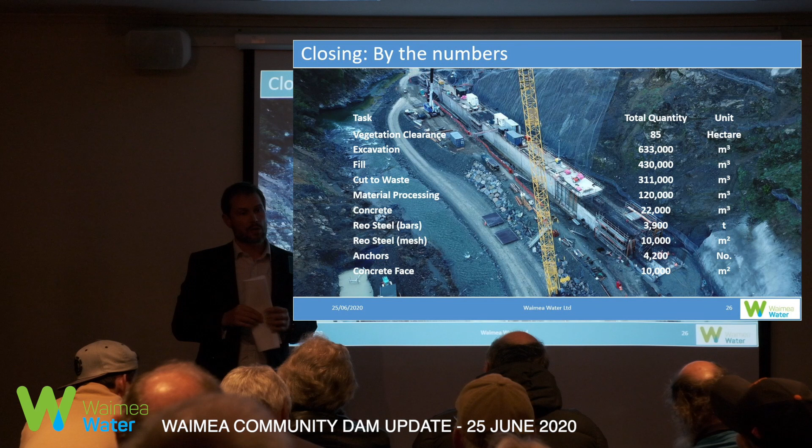Can you tell me how much the PVC liner costs? We will only go ahead with it if it makes sense - we haven't committed to it yet. We are working on the concrete face as the base case. We are looking at the PVC membrane as a means to save some money. If we don't get the savings out of it, or it doesn't give us a time benefit, we probably won't go ahead with it. We expect it to save close to $1 million if we go ahead, but if we can't get the savings, we probably won't do it.

So you're not going to put the concrete there, you're going to put the membrane? No, at the moment we're doing concrete - just to be clear. Is the membrane an add-on to it? Yes, it's an add-on. At the moment we're committed to concrete, and we are evaluating whether this has benefit to us. To put on top of it? No, instead of the concrete. Instead of the concrete? Yeah, instead of the concrete. Oh, God, Matt - so then you'd rely on the rock to hold the whole thing, no concrete face. That's it. A 3 mil membrane's not going to hold much at all.

Sorry, you've got a question? Yeah, Mike, just a question - with this pipe running underneath the dam, is it running all the time, or are you able to shut it off with this tunnel system you've got? I just wonder, with maintenance, if there's suction down there for logs and things that might enter the site upstream, from the natives and possibly even harvesting. Is there suction at the very bottom of the dam that debris can go through, and have you got a filter that stops the product going through, like wood?

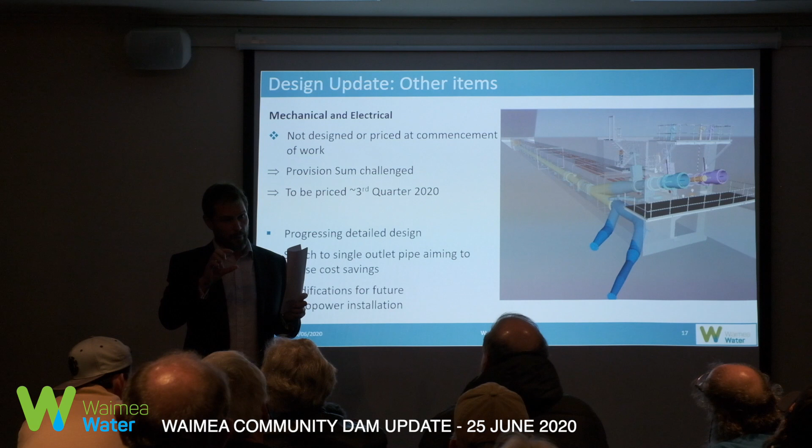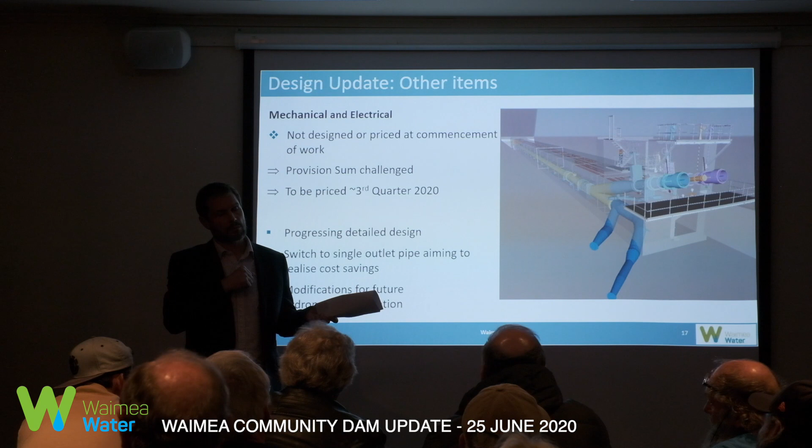Is there a placement to catch them, or will they run up against that 20 mil piping or mesh? Yes, they could go up against the mesh - we design it so they can go up against it in a safe way. And these intake screens are 6 tonne each, right - they're not small things. Yeah, no.

So the intake screens keep out any debris, and then the water that goes through the pipe goes out through 3 valves - we have 3 cone valves so we can moderate the flow. If you just did the small one in the middle, that's half a cubic - that's the environmental flow, the minimum. Could someone actually be sucked in themselves while working down there repairing these liners? I don't know anything about this one, Martin. No, because there's a screen up - there are screens at the intake.

Okay, that's good. So we've got the gentleman here first - coming back to the PVC liner.

This has been said to be a 10 or 20 year warranty product for what has been sold to everybody as a 100-year dam. I've heard people say, possibly even Waimea Water, that it can last 70 years in Switzerland or something. But is that an appropriate finish to the surface of the dam for what is promoted as a 100-year venture and benefit to the community?

The design life is greater than 70 years. They've said that 70 years is likely to be a minimum. It's designed under the design codes, we have to design for the life of the dam, and that's what the design report addresses.

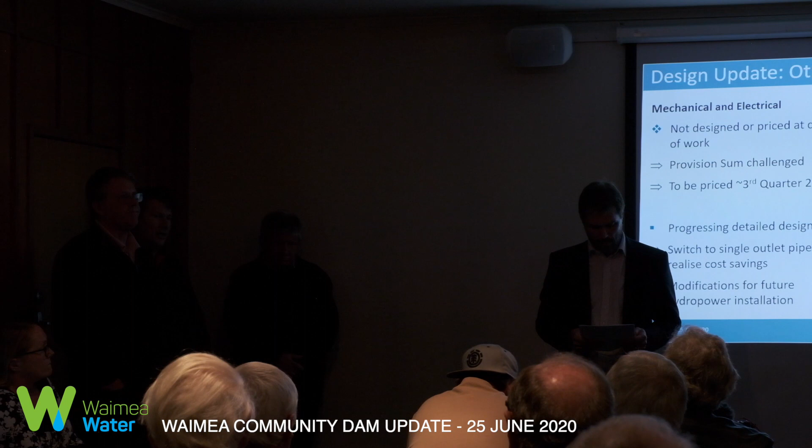I'd just like to switch now to people who have submitted questions who couldn't be here tonight. One gentleman, I think you've already asked this question, sir. Yeah, no, I'm happy with that. Right, another question was interested in the funding, construction, management. I think we've talked about that.

We talked a lot about the rock quality. I think the question was, would you agree that proper research of rock quality was not carried out prior to commencement? There have been rumours around the district that rock quality was not up to standard, which was disputed in the last meeting. The rock is not up to standard with respect to the drainage zones. The rest of it's fine. Maybe in hindsight, the previous designer should have picked it up. They didn't.

There's always a balance between how much you're going to spend not knowing the dam goes ahead versus knowledge. One of the troubles with trying to estimate the substrata is you've got a whole bunch of bores around the area, and it's essentially the estimates of the rock is almost on a linear extrapolation between those bores. What we're actually seeing is the total opposite, an absolute jumble of geology. One minute we're in argillite, the next minute good sandstone, which is great, we get excited, and then we're back into argillite again. So it's very confused and complex geology.

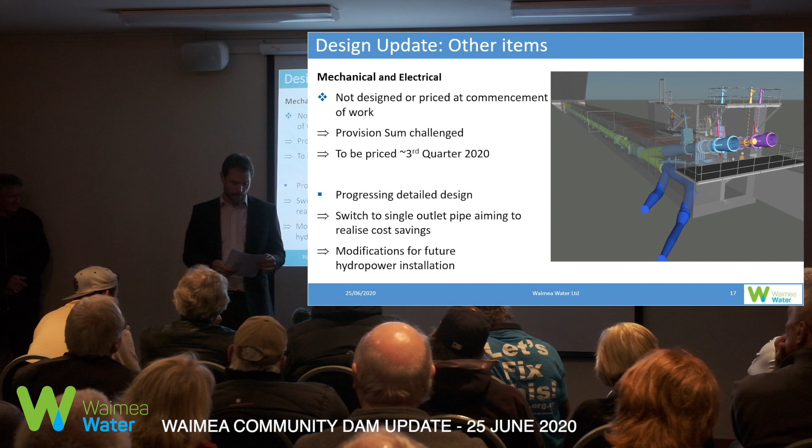Question here: I would like to ask, on completion, will there be public access to the dam or the viewing area to appreciate our beautiful countryside? At the moment, there is no public access to site. That's a matter for the TDC, and I'd imagine that the TDC will consider that. In fact, I think there's an obligation under the resource consent, isn't there? Yes, I think it's walking only.

There's a question about the estimate of the cost blowout, on the assumption that Waimea Water Limited is able to build a plastic face dam. Is that a foregone conclusion? The concrete face was reviewed by T+T and Mott MacDonald, yes it was. And if we revert to or stay with the concrete face, what does that mean for the cost of the dam? It's within the current budget, so the current budget of 129.4 contemplates both options.

Another question: could some explanation be given in practical layman's terms about the need for drainage suitable material, when the dam is actually meant to hold water back? I think we've covered that, have we not? Everyone understands why we have drainage layers. Yep, good.

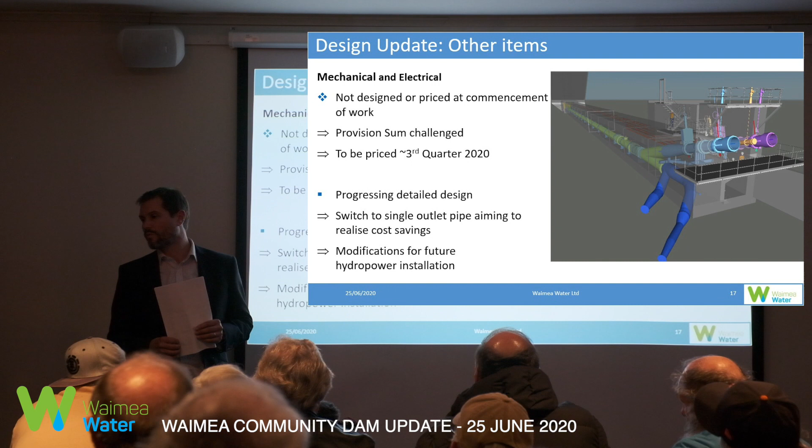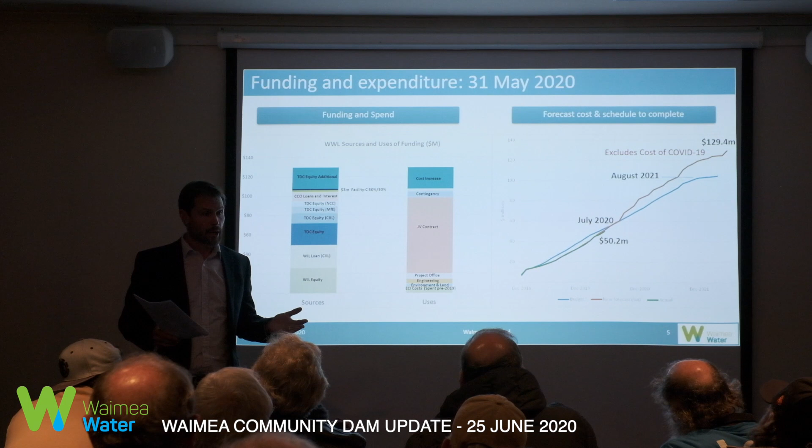So we've spent 50 million, right? 50.2. Okay, if you were to stop the project, you've first got to pay out the contractor - we've got a binding contract, so we have to terminate the contract, demobilise, pay out the contractor's costs, whatever else. But then you can't leave it there - you've actually got to smash it all up and take it out, that's called remediation, so we then have to remediate the area. At best, those two aspects are probably 20 million. So if you were to turn around and say you don't want to do this project now, the least you'd pay is 70 million.

And there's only one shareholder paying for that, and that would be TDC. And what's worse, you have to give your money back to the Ministry of Environment because they aren't getting their environmental flows any longer. You'd have to give your money back to Nelson City Council because they aren't getting what they want. So you have to return money to those parties, right? And so the TDC will be left paying that bill, 70 million bucks, by itself, without the money from Wellington or from Nelson.

And still with a problem, right? And then at half built, it's going to cost you 20 million to pull it down. When it's completely built, what's it going to cost to pull it down? Because it's got an end of life, you're going to have to pull it down at that and put it back to a river, aren't you? Is that not in the plan? I read it somewhere in the document. My children, grandchildren, great-grandchildren will be using the benefits of the dam.

Okay, Richard. From what you've said tonight, the geology wasn't explored enough, and until you open it up, you don't know what you're going to get. So it was pretty reckless, if not dishonest, for somebody to put in a P95 on that price at 82 million. Really, because being a contractor, until you put a bucket in the ground, you don't know what the hell you're going to dig up. And generally you allow that provision for going over. So a P95 to me was a very reckless thing to put in, if not completely dishonest, because there's no way that you can guarantee that P95. Well, not you, but yeah, look, whoever put that in.